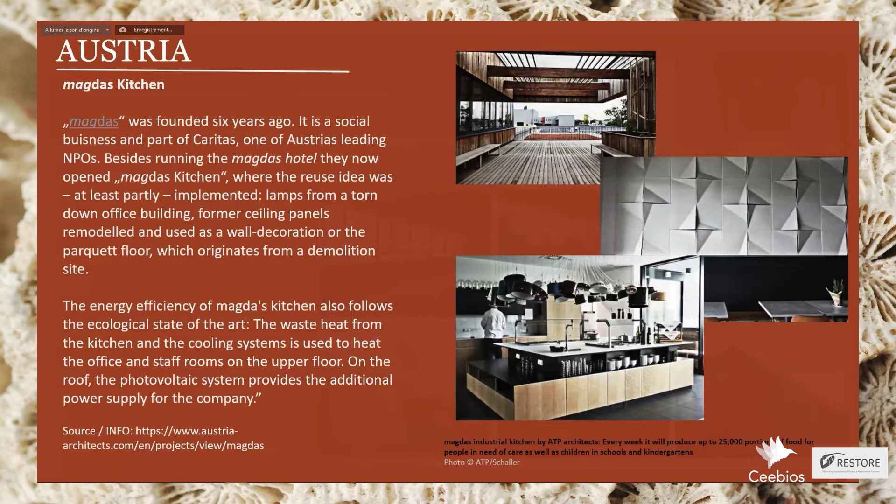Another example is Klan Kosovo TV, where this idea of recycling was even more part of the concept, or was really the main idea. They used recycled and reused material from this industrial building, and they also used, for example, bricks from buildings that were demolished during the war, or railway sleepers. From this example, I would like to show you a short video. So I hope you can see it. Yes.

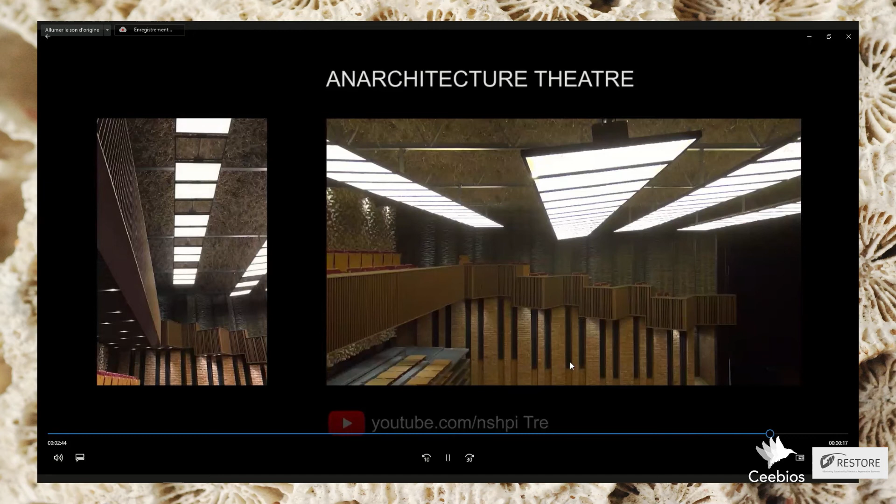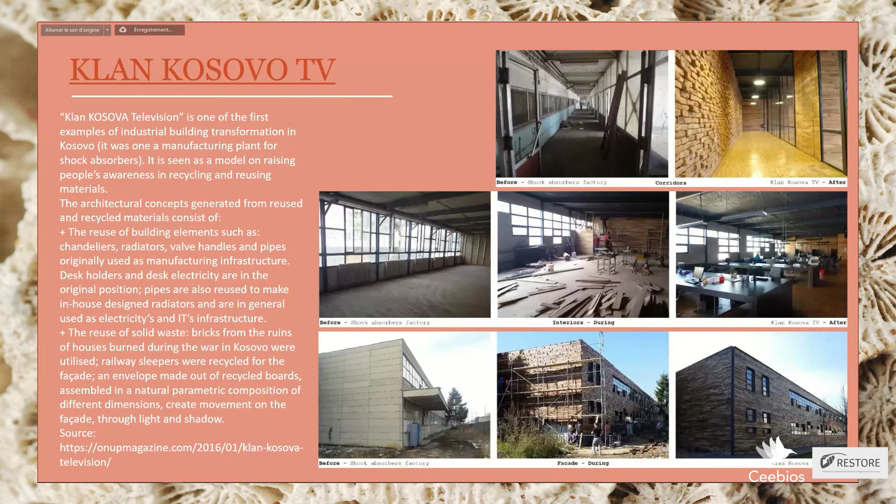Yeah, this was Klan Kosovo TV. And just to show a few more examples, this is a modern seaweed house in Sweden where they reinvented, I would say, a traditional material, seaweed. I think it's a good example not only from the ecological side, but also from the educational side, to bring forward historical traditional knowledge.

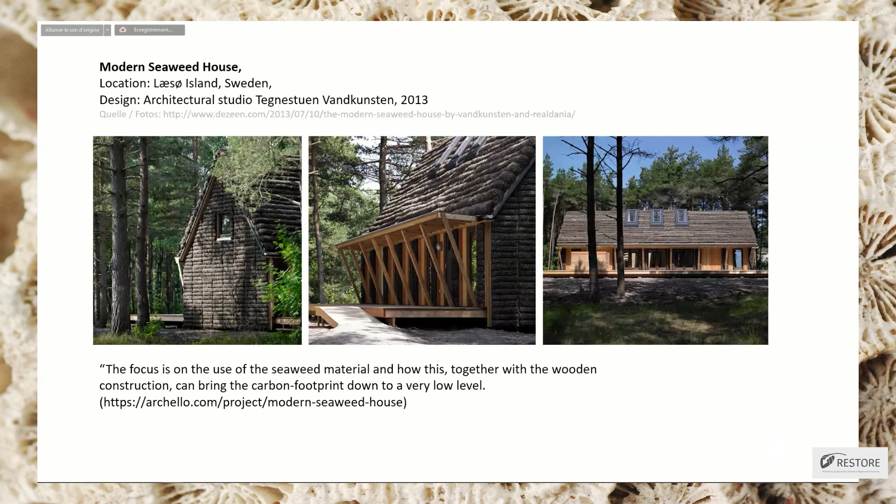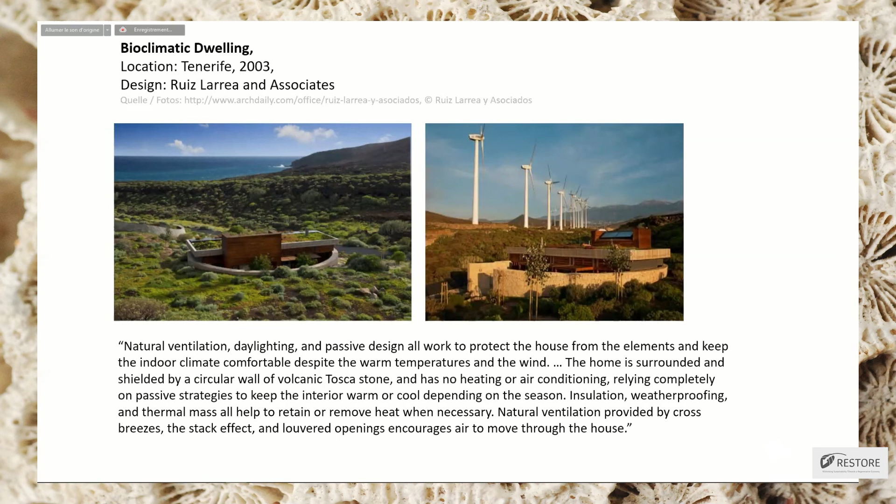So yeah, thank you very much. If you have any questions, please feel free. I hope I could give you a brief insight into what we have discussed in Working Group 1.